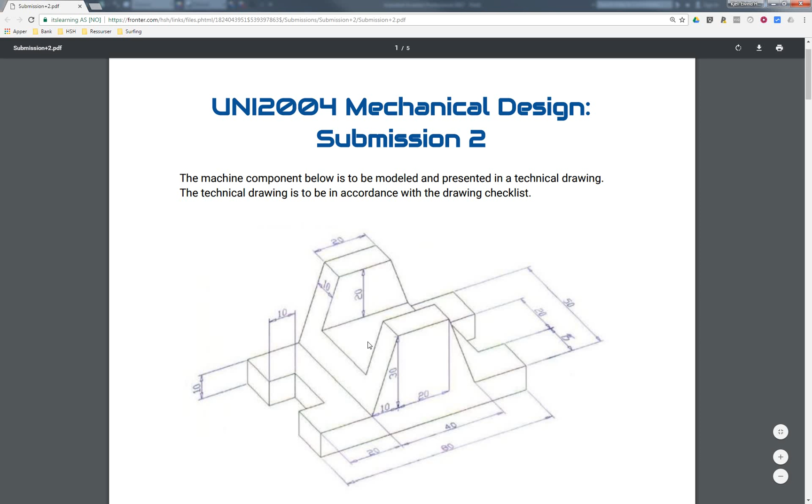This will be a quick walkthrough of creating submission 2 in Inventor. So we have this drawing to work from, and we have quite a lot of dimensions, so we should be all right in creating this part. I'm just going to move it over to my other screen, and then we can start off.

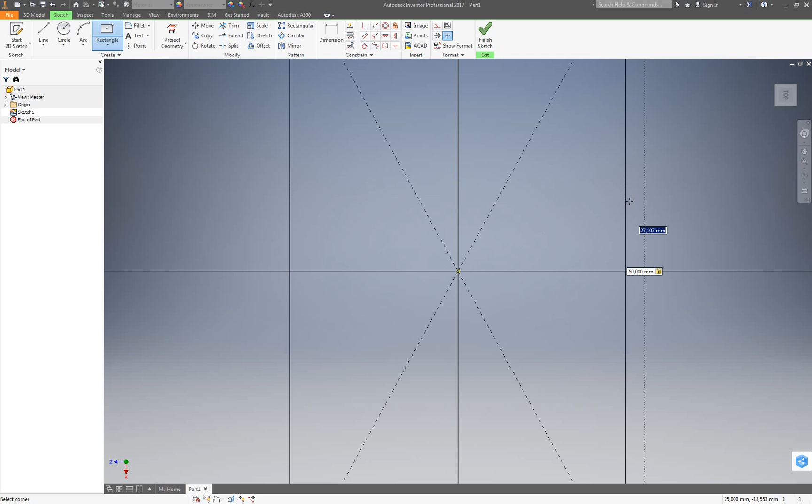We'll start by creating the base, which will be a rectangle. I prefer using a 2-point center rectangle so that I can set the center of it. I just need to scroll down a bit on my other screen so I can see all the dimensions. Back in Inventor, we are going to have 50 in width and 80 in length. So put this one in here, and press enter to set it in place.

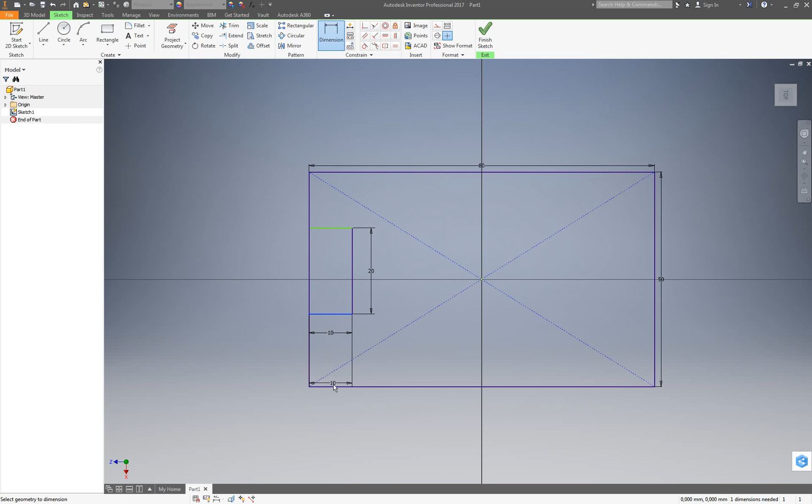Now if I want to, I can also add the little slots on the ends. I can do those by putting in a new rectangle here. I'll attach it to this end, and set the height of the slot as 20 and the depth of the slot as 10. Lock both of those in place, and I hit enter. Now I need to set it from the bottom here, where we have been given a 15 millimeter dimension.

I could mirror this one across the center, but it's going to be just as easy to just create a new one. So 20, 10, lock it in place, and put the dimension up: 15.

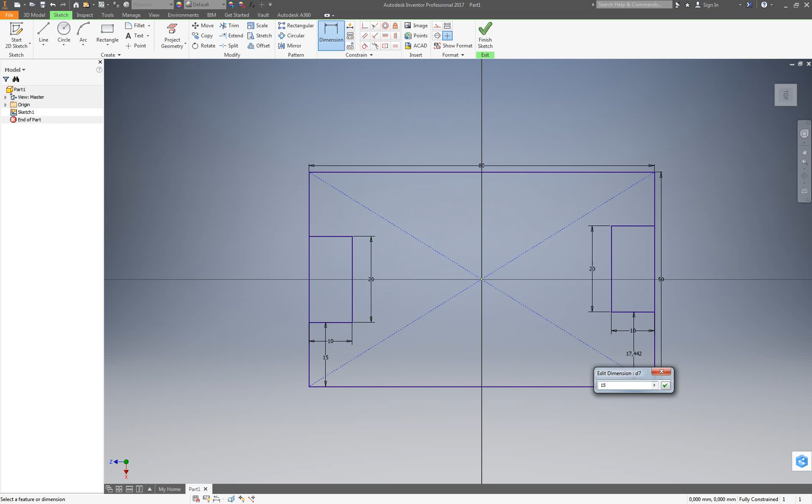I press finish sketch, zoom out a bit, and then I'll extrude it. I won't extrude all of it, only the inner part here, so that I've already removed the slots from it. And it's supposed to be 10 millimeters thick.

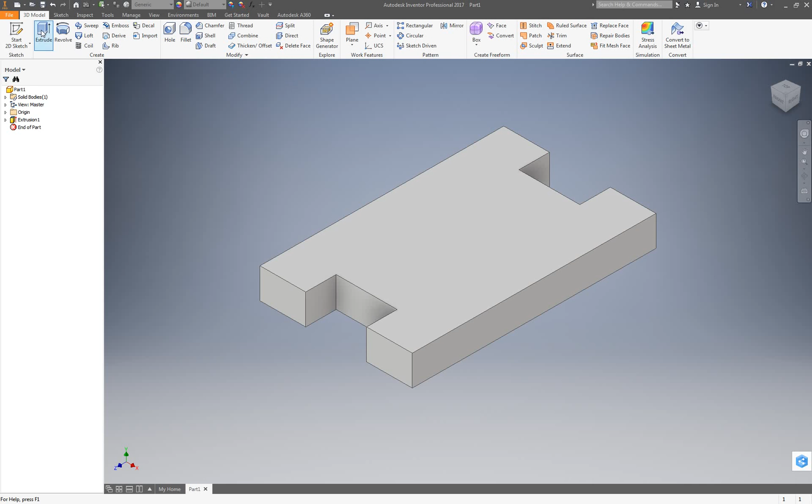Now I need to create the top part, and I'll do that by creating a sketch over on the side here, and I'll be creating another rectangle. I might just do a project geometry first so that we get some lines to attach it to.

So I'll create another rectangle here, and it's going to be 20 tall and 40 wide. So 40 wide there and 30 tall — I looked at the wrong dimension there, so 30 tall. Lock that one also into place, and I'll set it there.

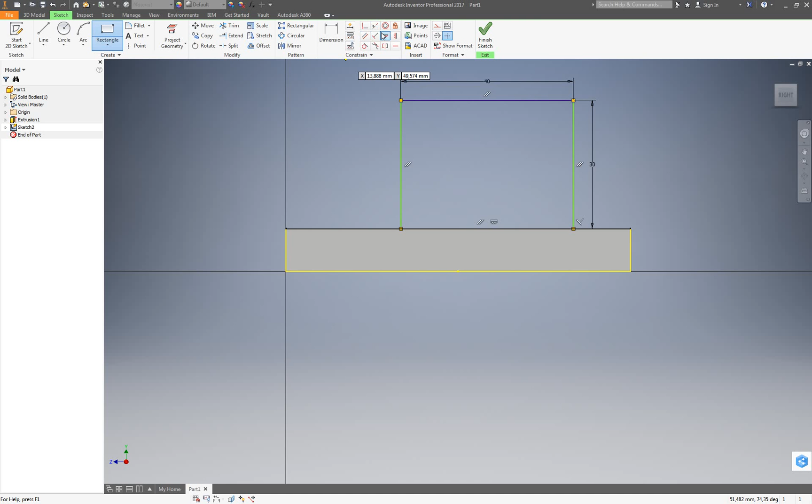Now I'm going to use a vertical constraint in order to lock the midpoint of this one vertically above the center of my original plate.

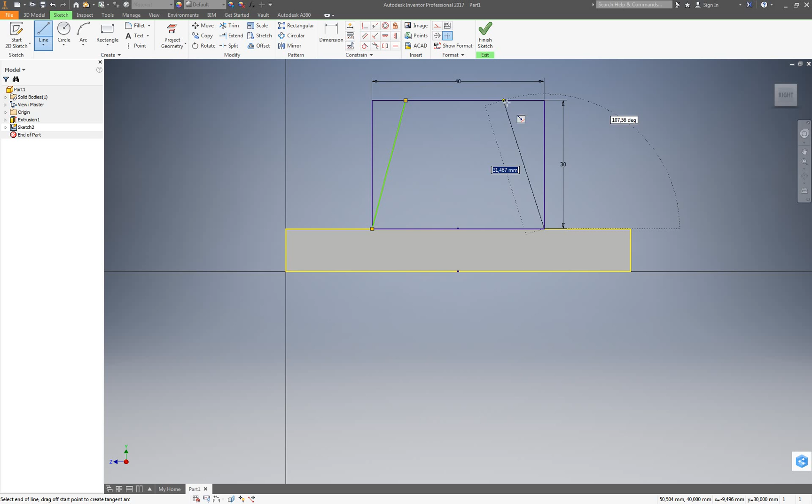I'm going to create an angled line on this side and connect it to the top, and an angled line on this side and connect it to the top. I'm supposed to have 10 millimeters between these. There, and I press finish sketch.

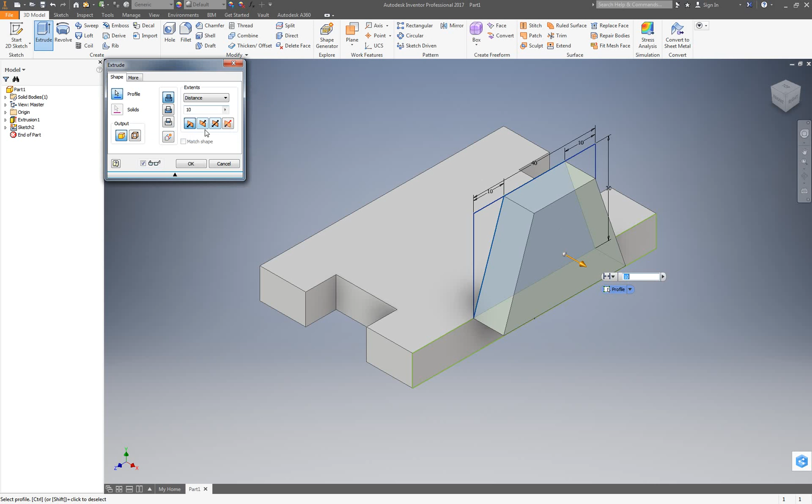Now I can extrude this part, but I want it to go the other way, and I want it to go to a certain face, so I'm going to switch around here, and press on this face here, so it's going to extrude all the way to that side.

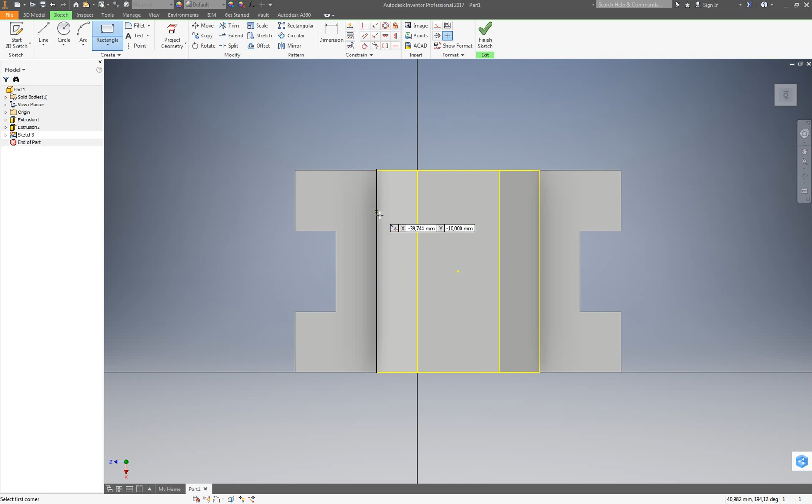So what I need now is to create one last sketch up top here. I'm going to create one more rectangle, and attach it. First I'm going to project some geometry here to get some lines, and connect it to this line, and to this line over here. But first I'm also going to set the width of it to be 30.

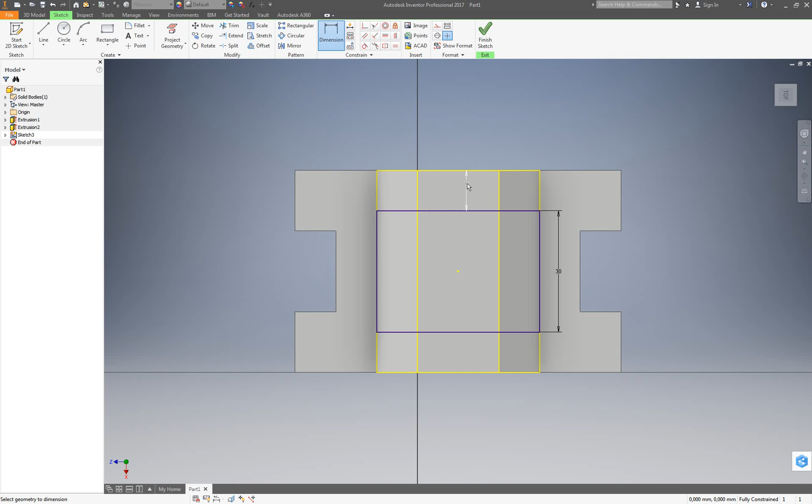Then I'm going to connect it to that one. Then I can set the dimension up to the top as being 10. That's going to give me 10 down below also. And then I click Finish Sketch.

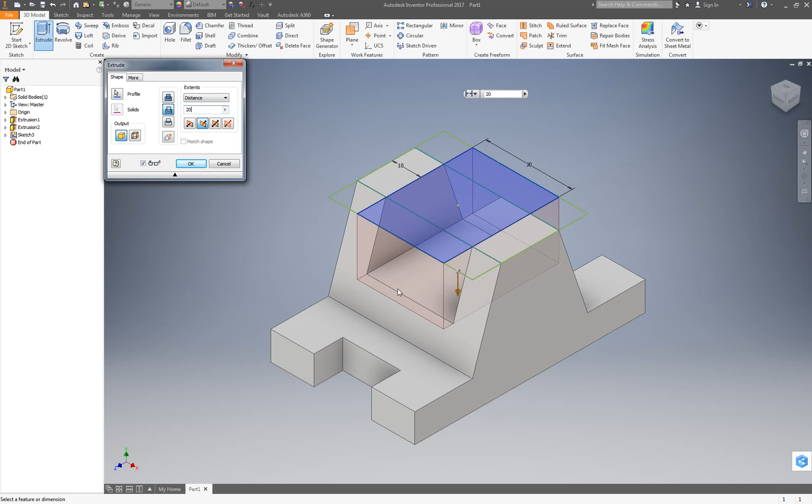So now I'm going to extrude the middle part here, and I'm going to cut it down 20 millimeters. As you can see, by going all the way out to this edge up here, I've managed to do a complete cut all the way through this one.

And that's it. The 3D model is complete. We can pivot it a little bit just to see that everything is there.

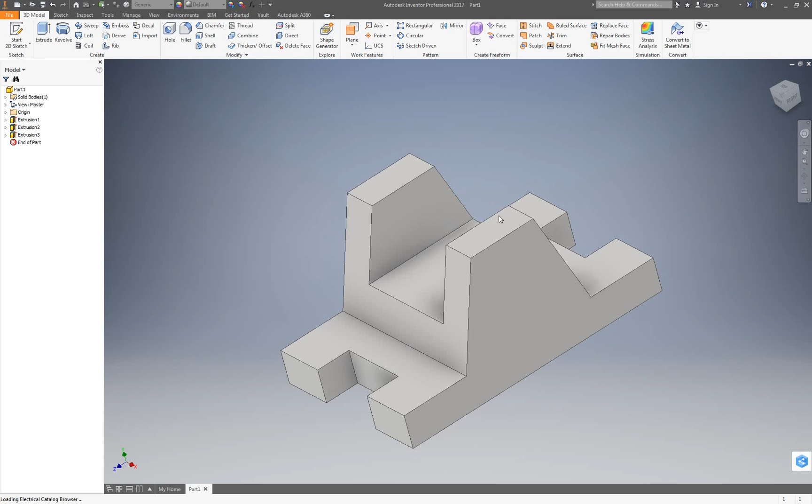And then I'll just quickly show it in the drawing how I would put my dimensions on it. Materials and notes and everything in the drawing is something you should be able to do by yourselves now.

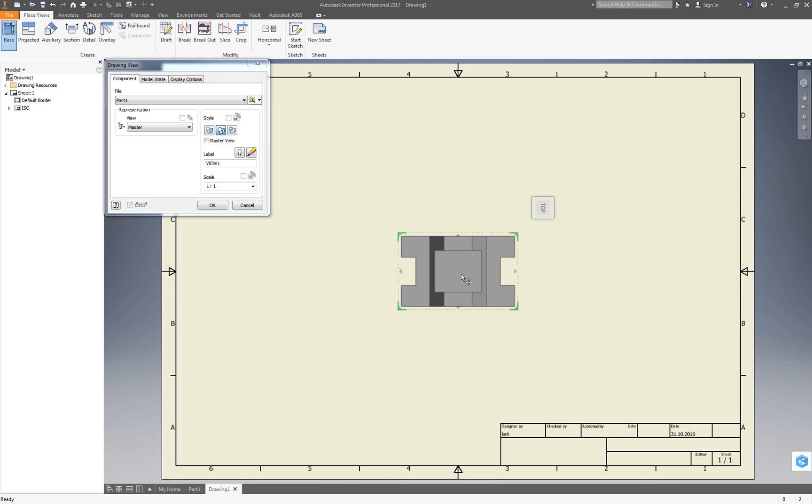So for now we'll just set the main view here. Let's see the main view, and if we put it up like this, it's going to tell us quite a lot about the drawing. And if we throw this one up here also, we're also going to get quite a lot of information, and we might be able to manage it with just these two, or maybe not. It might be necessary to show it over on the side there also.

We'll see. Now I have to save my part first, so I'm just going to call it part 1 for now.

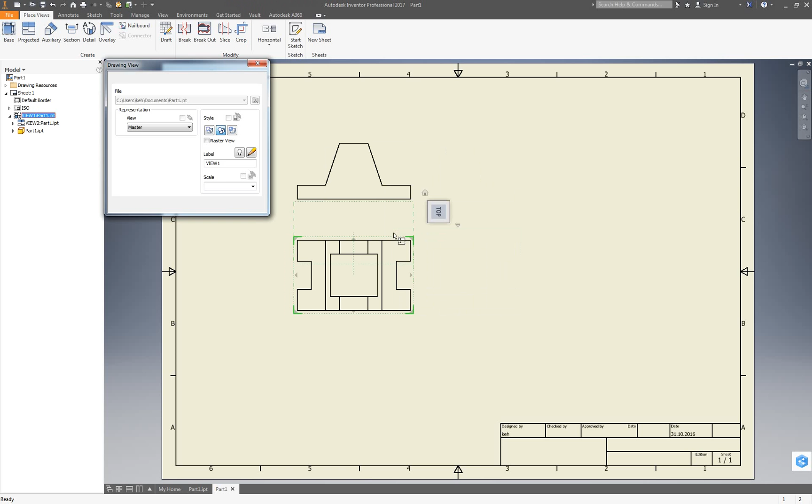Maybe we could up the scale once, say 2 to 1, just to make it a bit more easy to read.

Definitely one thing we're missing here in these two views is to see how far down this part is going to go. One possibility would be to put in hidden lines on this one, because the only thing we would get was a hidden line across here and a hidden line down here, so it's not going to be all that disturbing. But we might also just put in a projected view over here to show everything there.

If we start looking at everything here now, we would get the width of this slot over here, and we will get all of the widths that we need. We can give all of our heights on this view, and then all of our lengths on this view. So actually we don't need the one that we originally placed as the base view. We could make do with just these two.

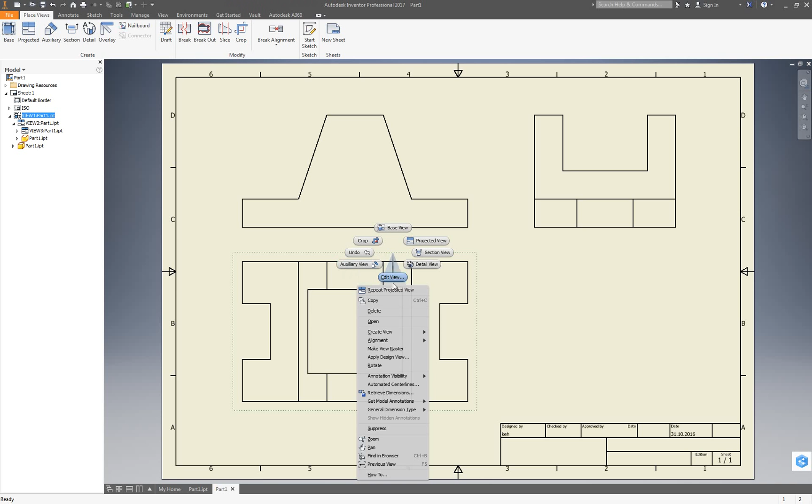So let's do that. We're going to delete this one, and as soon as I delete this one, the others are also going to disappear. So I need to put a new base view in. Now I'm going to show it from the side here.

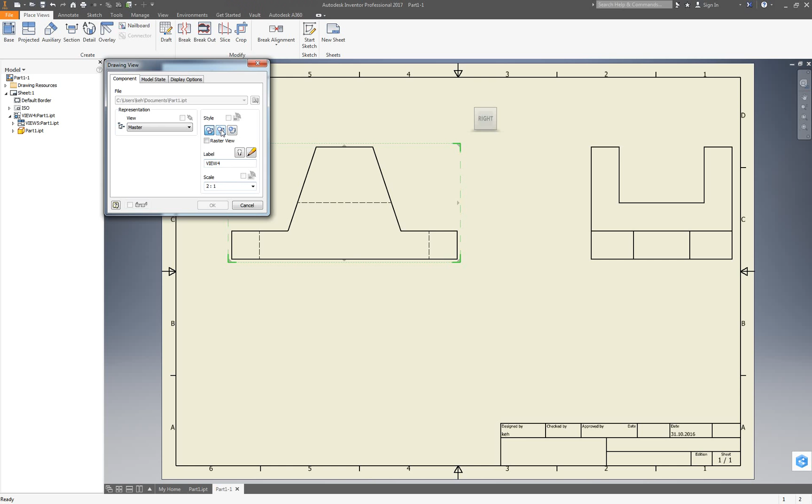We'll pump it up a bit, and then we'll put over the projected view first off. And now it says hidden lines on this one. We don't want hidden lines on it like this, because as long as we now give a projected view over here...

This projected view needs to be scaled down a bit. This projected view is giving us the shape, so it's giving us the 3D views, and now we know how our part is supposed to look.

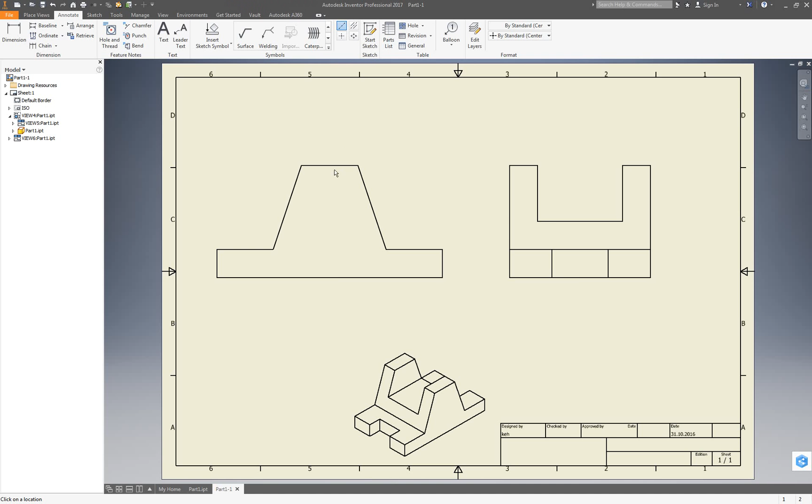Could actually put this one over here, so we'll get some more space on our drawing. Now we can start thinking about putting in dimensions. The nice thing here is that we have quite a lot of symmetry on this part, so we can put in a lot of symmetry lines.

So we'll mark this one and we'll just pull it up here. This is just to show that the entire part is symmetrical. And then we can start doing dimensions.

First off, we'll do the top here. We're going to need to switch it to default method 1B. So the top up here, and we can also give the total length over there, and we can give the total length over here.

And then I suddenly figured out there is in fact one dimension that I can't give on this one, and that's between the inner part of the slot, so from this edge to the other side. So that's something that I'm going to have to think about showing.

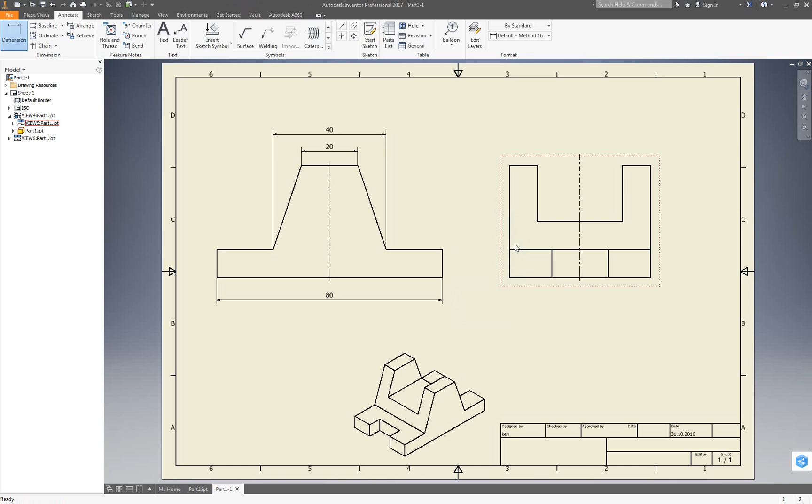So one way I can do that is, in fact, if I start over again, I'm going to delete these, delete this one. I can keep that one, that's a nice one to keep. So if I do the view that I had at first...

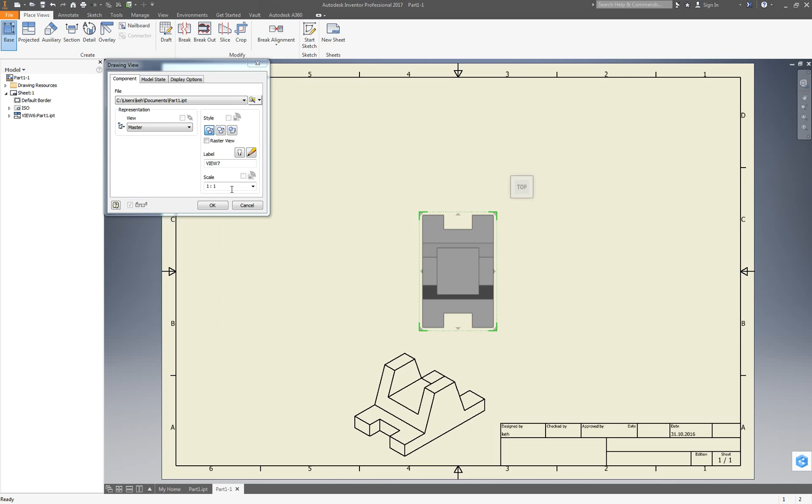I can actually do it this way, and I can flip it the other way around. So 2 to 1 there, press OK, I'll put this one up here.

So one thing I can do now is actually do a section view through this one. That's going to help me. So I'll put a section view through here, and that's going to give me all of the internal lengths that I need.

Then we'll go back to the annotate part. We'll start putting in symmetry lines again, so we have a symmetry line going across here, and we have a symmetry line going from top to bottom here, behind the section line, and we have a symmetry line going through here.

So what we can do now is give the lengths, the external lengths in this case, so this one, and this one, and the total length over here.

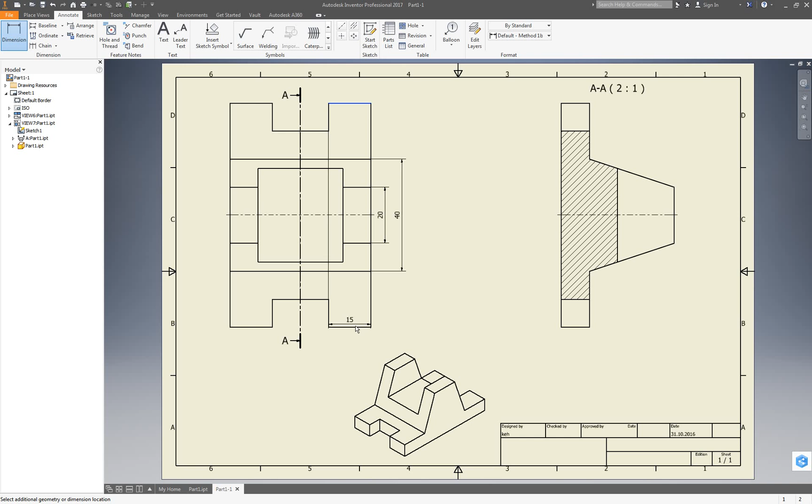And then I can give the internal length of that one. I can also give the internal length here, but just as a reference, because this one is controlled by the height of the cut here, so this one needs to be a reference if I put it in.

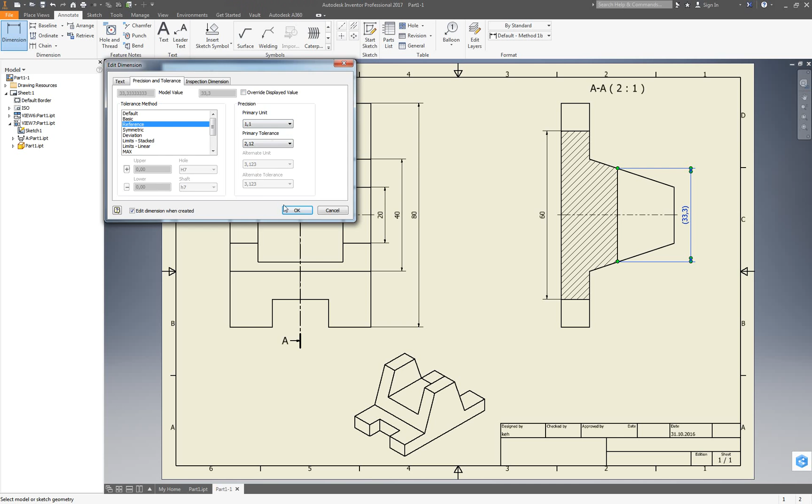We could even also limit it to just one decimal point to show there. So heights would be nice to put in here. So we'll put in height there, and it's not symmetrical this way, so we don't have a symmetry line I can go across.

So then I'm going to use the same baseline for all of my dimensions here. Then we need the width of everything, and this is the only one that's going to be a bit silly, because it's going to go far into the part.

But that's just the way it is sometimes. So we're going to give the widths over here. Need to move this one off a bit to the side here, so over here.

Right, so let's see if we have everything we need. For this slot, we have the width of the slot. We also have the dimension between this end and this end, which is going to give us the depth. So we have everything we need to create this slot.

We have everything we need to create the entire outline, because we have the total width and we have the total height with the 80 and the 60.

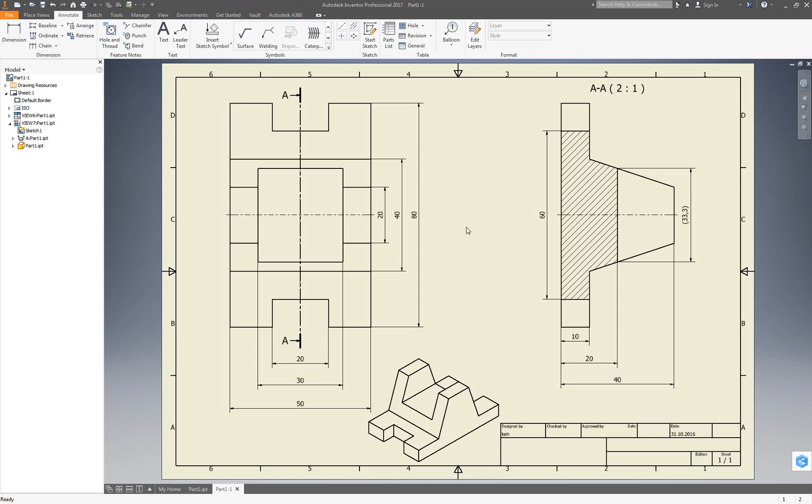And we also know the thickness of the bottom of the plate. So now we have absolutely all of the dimensions we need to create this one, or to manufacture it, rather. That was it.